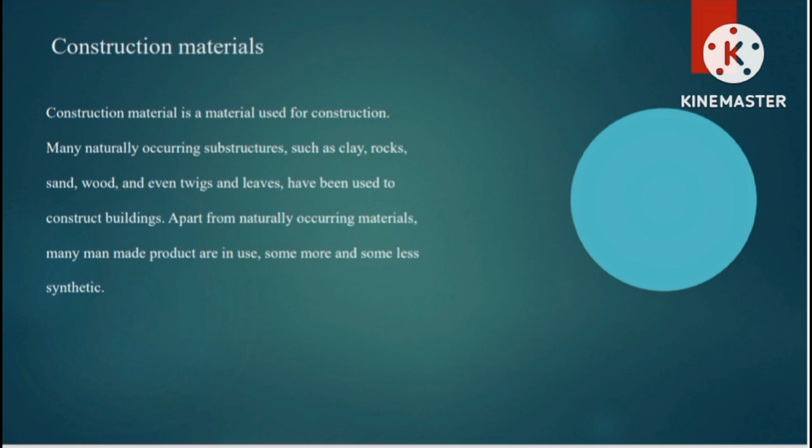Construction materials. Construction material is a material used for construction. Many naturally occurring substances such as clay, rocks, sand, wood and even twigs and leaves have been used to construct buildings. Apart from naturally occurring materials, many man-made products are in use, some more and some less synthetic.

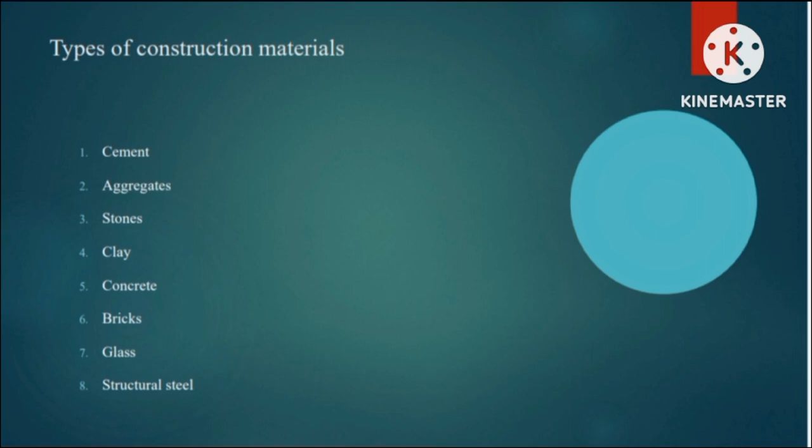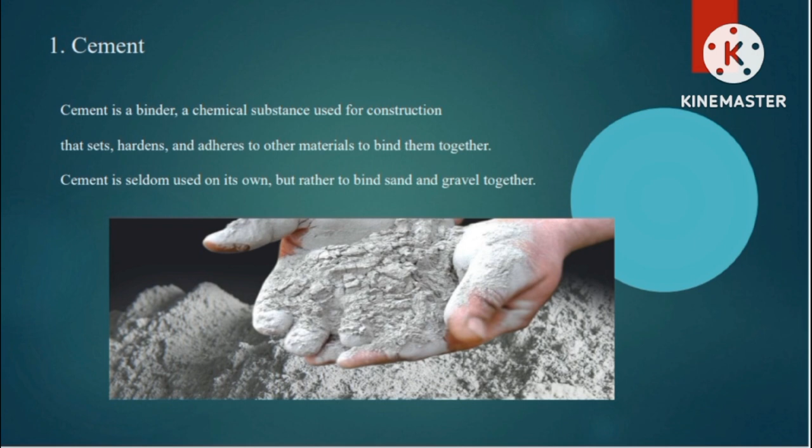Types of construction materials: cement, aggregate, stones, clay, concrete, brick, glass, structural steel, timber, tiles, bamboo, carbon fiber. First we discuss the construction material cement. Cement is a binder, a chemical substance used for construction that sets, hardens and adheres to other materials to bind them together. Cement is seldom used on its own, but rather to bind sand and gravel together.

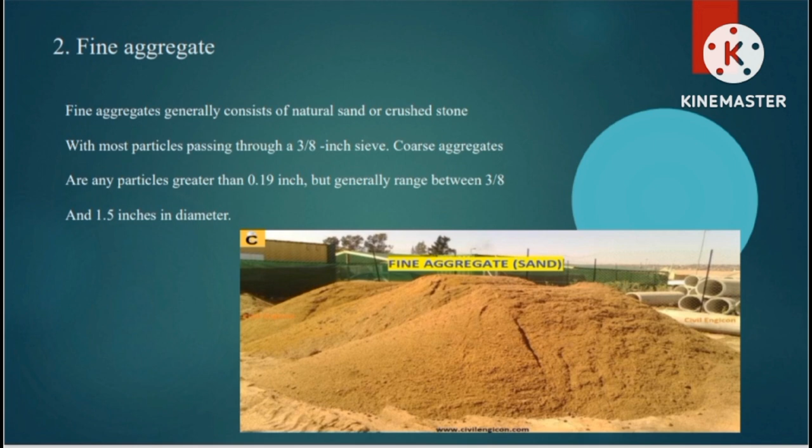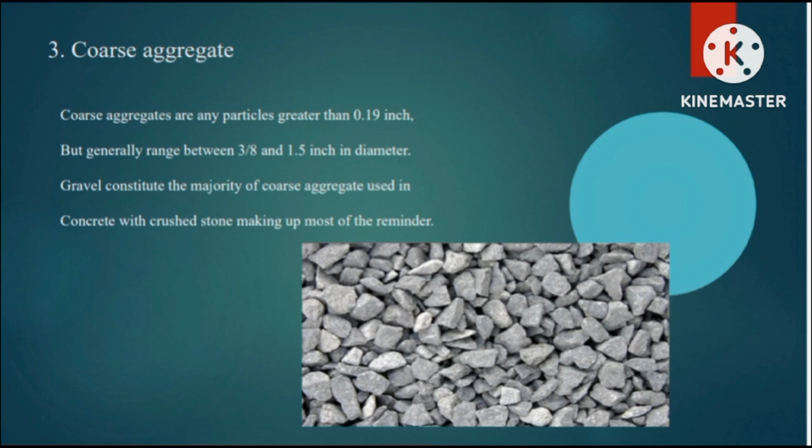Fine aggregate. Fine aggregates generally consist of natural sand or crushed stone, with most particles passing through a 3/8 inch sieve. Coarse aggregate. Coarse aggregates are any particles greater than 0.19 inch, but generally range between 3/8 and 1.5 inches in diameter. Gravel constitutes the majority of coarse aggregate used in concrete, with crushed stone making up most of the remainder.

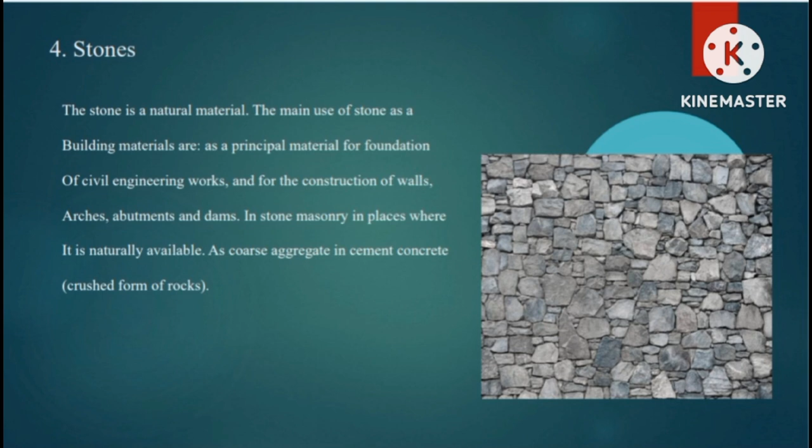Stones. The stone is a natural material. The main uses of stone as a building material are as a principal material for foundations of civil engineering works and for the construction of walls, arches, abutments and dams, as stone masonry in places where it is naturally available, and as coarse aggregate in cement concrete crushed form of rocks. Next one is clay. Clay is a type of fine-grained natural soil material that develops plasticity when wet but can be hardened through firing.

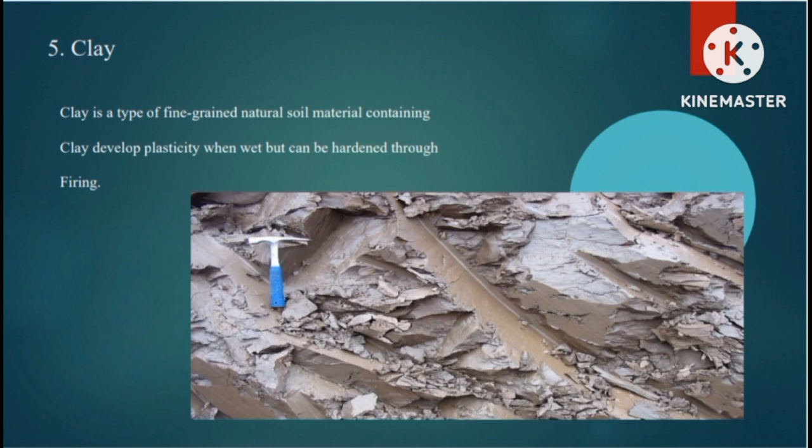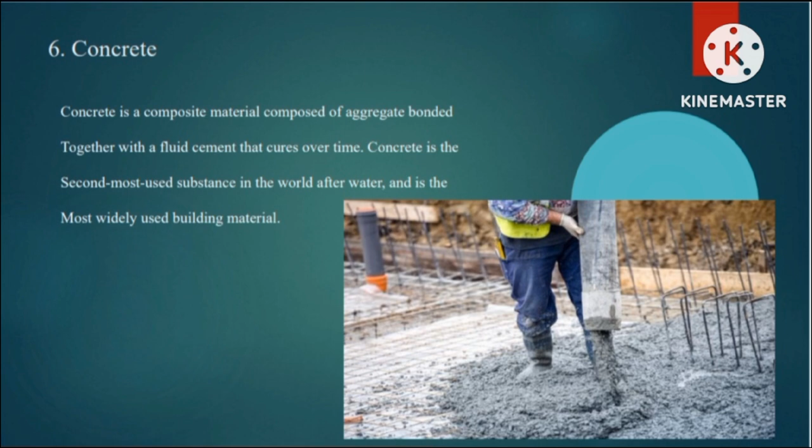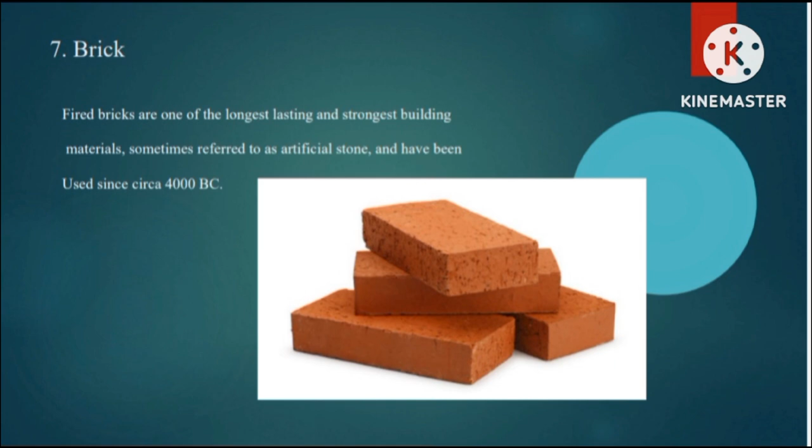Next one is concrete. Concrete is a composite material composed of aggregates bonded together with a fluid cement that cures over time. Concrete is the second most used substance in the world after water, and it is the most widely used building material. Brick. Fired bricks are one of the longest lasting and strongest building materials, sometimes referred to as artificial stone, and have been used since circa 4000 BC.

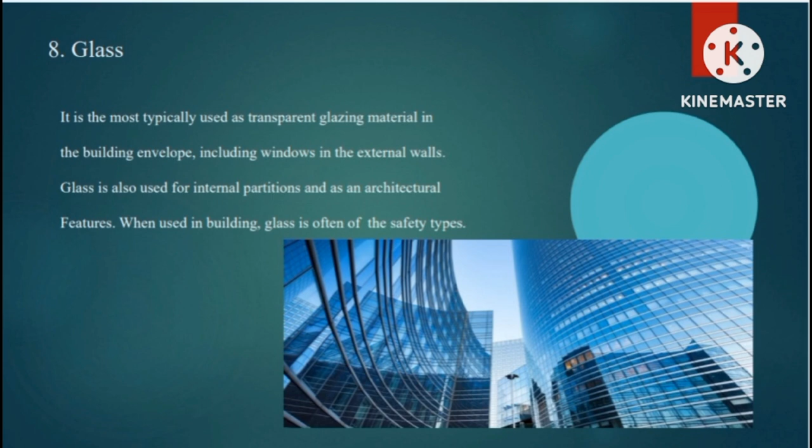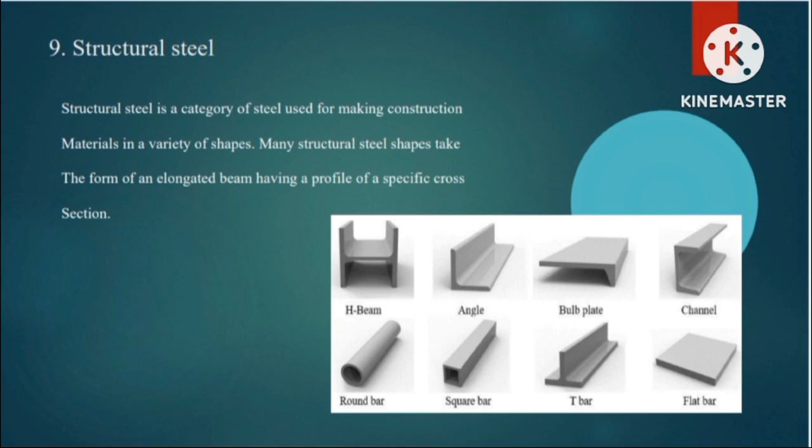Glass. It is most typically used as a transparent glazing material in the building envelope, including windows in the external walls. Glass is also used for internal partitions and as an architectural feature. When used in buildings, glass is often of the safety type. Structural steel. Structural steel is a category of steel used for making construction materials in a variety of shapes. Many structural steel shapes take the form of an elongated beam having a profile of a specific cross-section.

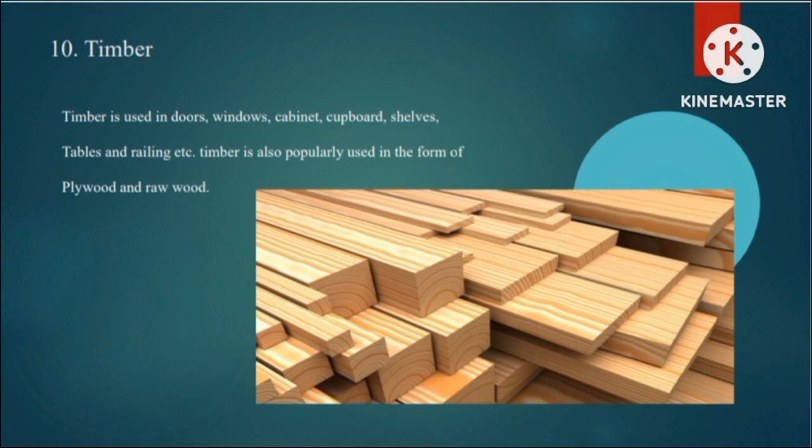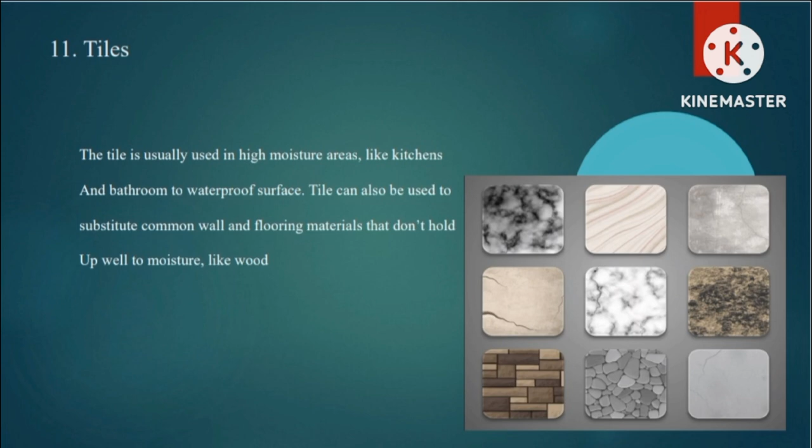Timber. Timber is used in doors, windows, cabinets, cupboards, shelves, tables and railings, etc. Timber is also popularly used in the form of plywood and raw wood. Tiles. Tile is usually used in high moisture areas like kitchens and bathrooms to waterproof surfaces. Tile can also be used to substitute common wall and flooring materials that don't hold up well to moisture, like wood.

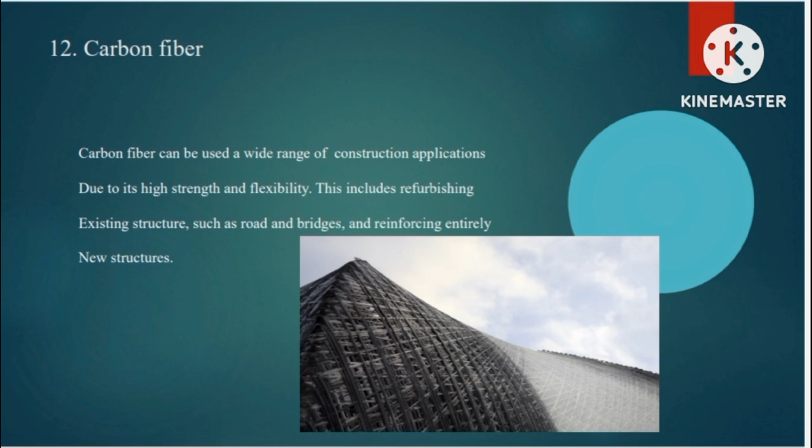Carbon fiber. Carbon fiber can be used in a wide range of construction applications due to its high strength and flexibility. This includes refurbishing existing structures such as roads and bridges and reinforcing entirely new structures. Next we discuss the construction elements. Construction elements are the virtual equivalents of actual three-dimensional building components. They include walls, columns, beams, roofs, shells, slabs.

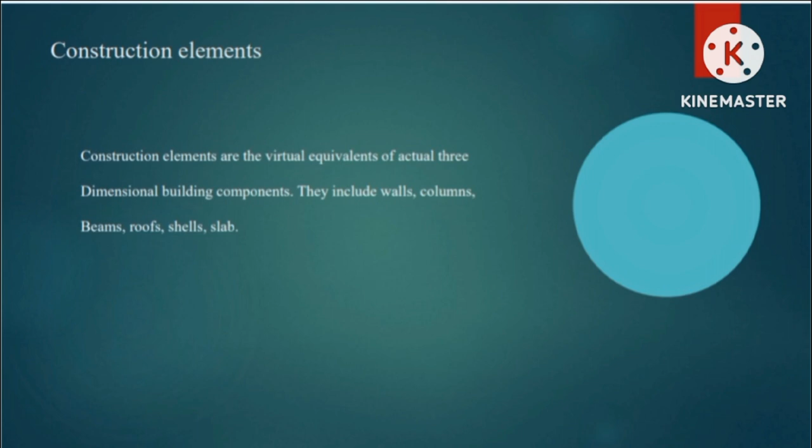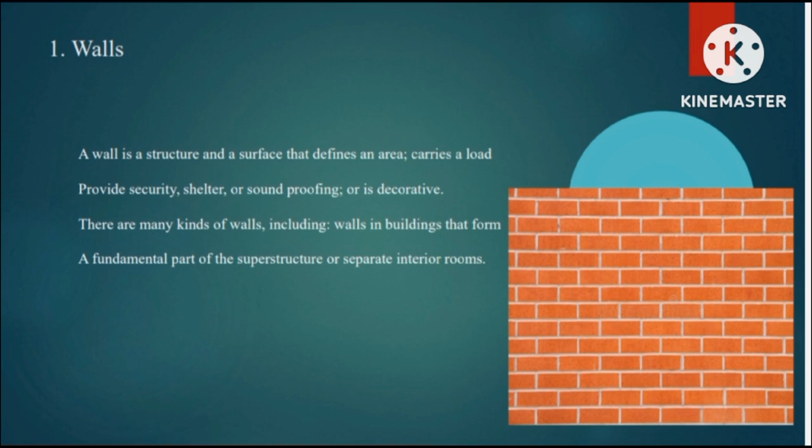First one is walls. A wall is a structure and a surface that defines an area, carries a load, provides security, shelter, or soundproofing, or is decorative. There are many kinds of walls, including walls in buildings that form a fundamental part of the superstructure or separate interior rooms. Beams. In building construction, a beam is a horizontal member spanning an opening and carrying a load that may be a brick or stone wall above the opening.

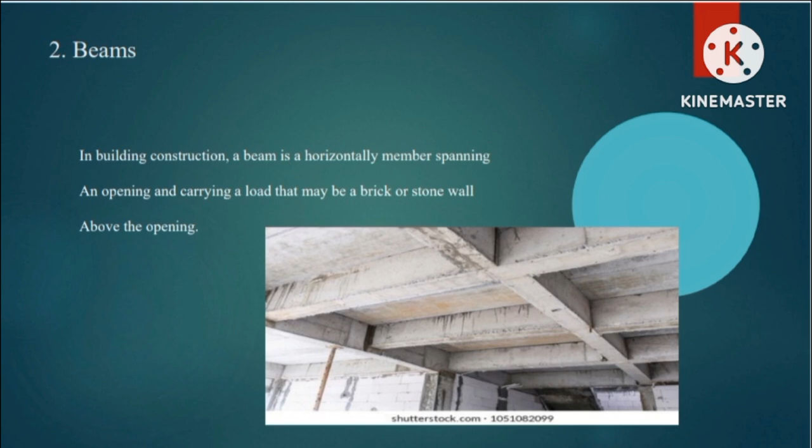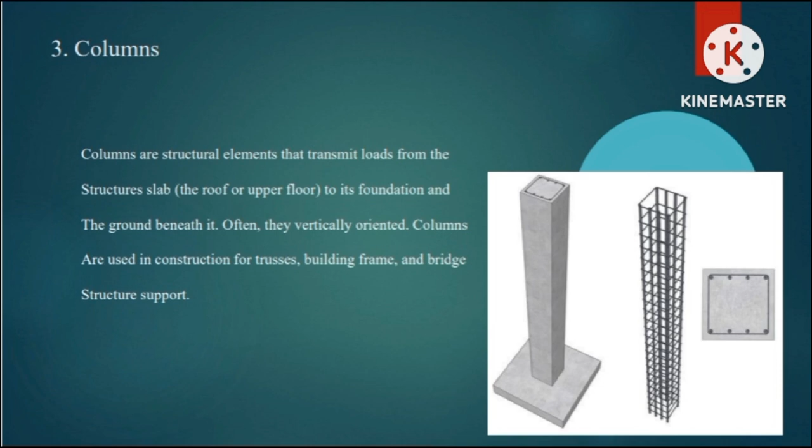Columns. Columns are structural elements that transmit loads from the structural slab, the roof or upper floor, to its foundation and the ground beneath it. Often they are vertically oriented. Columns are used in construction for trusses, building frames, and bridge structure support. Roofs. Domestic roof construction is the framing and roof covering which is found on most detached houses in cold and temperate climates. Such roofs are built with mostly timber, take a number of different shapes, and are covered with a variety of materials.

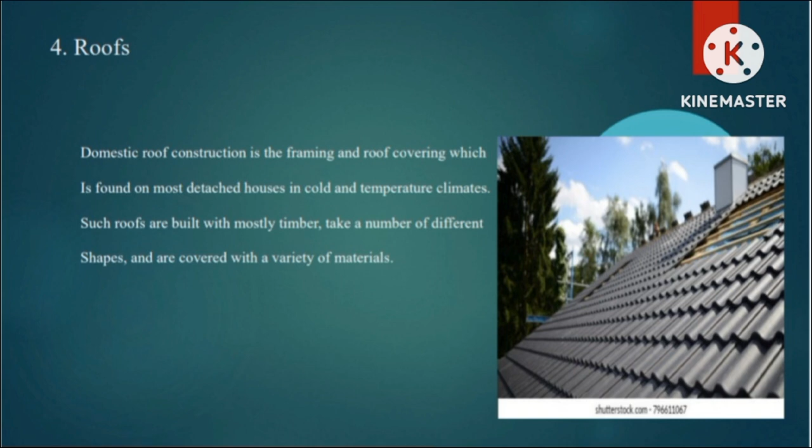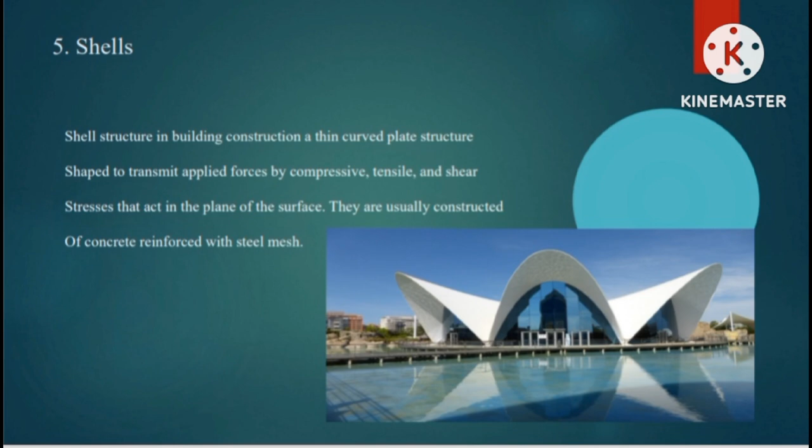Shells. A shell structure in building construction is a thin curved plate structure shaped to transmit applied force by compressive, tensile, and shear stresses that act in the plane of the surface. They are usually constructed of concrete reinforced with steel. Slabs. A slab is a structural element made of concrete that is used to create flat horizontal surfaces such as floors, roof decks, and ceilings. A flat slab is generally several inches thick and supported by beams, columns, walls, or ground.